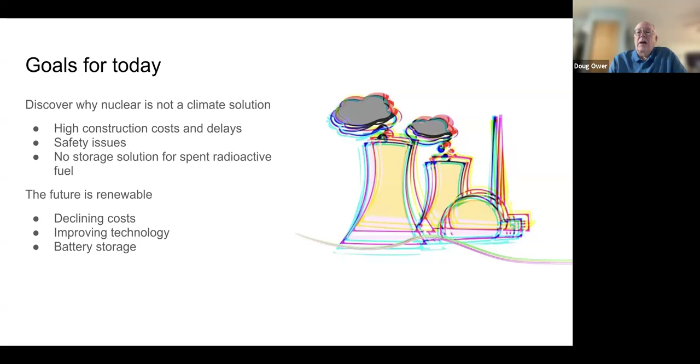The future is renewable power, and costs are going down, technology is improving, and battery storage, which is a vital piece of that to make renewable work, is also coming on very strong. We'll get into that more as we go along.

So here's the Zion nuclear plant. It started in 1973, 74. Each reactor started separately - there's two reactors, each one was about 1.1 gigawatts. It shut down in 1998, and then decommissioning started about 2010, went to 2023.

The ZCAP commission was basically disbanded when COVID started. Most of the decommissioning was done, but there was a problem, which I'll mention later. The site was released by the NRC, so the nuclear license was transferred back to Constellation from the contractor who held the license during the decommissioning. It was about $900 million to decommission that plant, and that's actually on the lower end of the scale - San Onofre is going to be over $4 billion to decommission.

We are left with 65 dry casks of spent radioactive nuclear fuel, and high-level nuclear waste stays on site. There's no place to send it, so we will have that sitting on our lakefront for many decades to come.

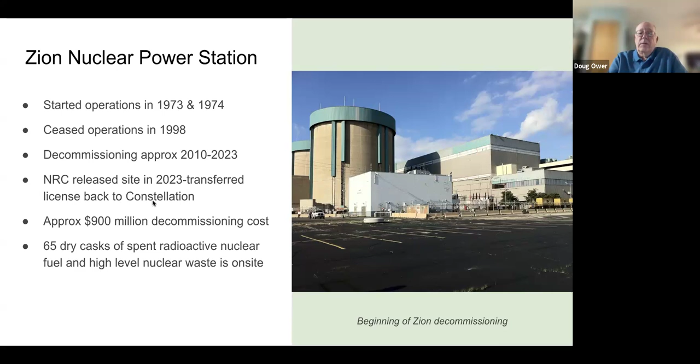Okay, why is this not... I was asked to describe a little bit about the nuclear cycle. There's a couple different ways of doing it, but this is what Zion was - it's a pressurized water reactor. On the left side is where the nuclear rods are, or the core, and control rods to control the reaction. Basically all it does is generate heat - the whole point to nuclear is to generate lots and lots of heat.

That very high pressure, very hot water is pumped to a steam generator - they're both inside the containment dome. From the steam generator, that's converted to steam, and that feeds out to turbines. They show one in the picture, but in reality there were two - a high pressure and low pressure turbine, and then those spin an electric generator, which feeds out to the grid. On the lower end of the drawing, you have the condenser - you have to turn the steam back into water to reheat it. Here it shows a cooling tower, but in Zion, we just dumped all that extra heat into the lake.

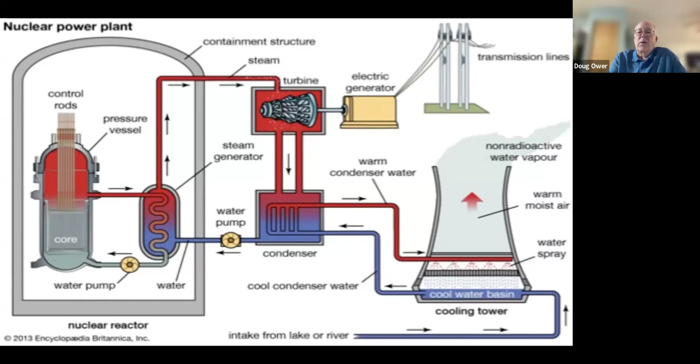Several things are done - one of the sites we have in Illinois, one of the nuclear plants, they have a big artificial lake they made that they use for cooling. Sometimes it goes into rivers, but the cooling tower is very common - that's what a lot of people see.

So this is inside the plant during decommissioning. You can see in the front is the generator, and then there's two turbines - this is for one of the reactors. There's a high pressure, low pressure steam turbine, and then that spins to operate the generator.

One of the strange things about Zion is when they shut it down, they reversed that - they turned the generator into a motor. They powered it from the grid, spun the motor to turn the turbines, and they said that was needed to stabilize the grid. I don't know what they did after that was disconnected, but they did that for a number of years after Zion closed.

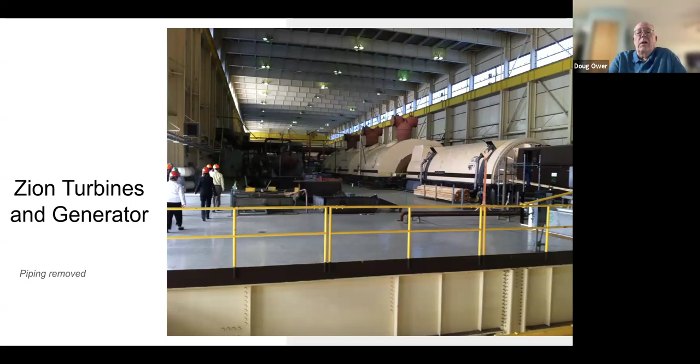So this is Sierra Club's position on nuclear power. This was adopted in 1974, and it opposes the licensing, construction, and operation of new nuclear reactors, pending resolution of safety problems inherent in operation, disposal of spent fuels, and possible diversion of nuclear materials capable of use in weapons manufacture. All three of those problems still exist. It also calls for establishment of adequate regulatory machinery to guarantee adherence to the foregoing. Right now, there's a lot of talk about reducing nuclear regulations, which will make it even less safe.

As I mentioned, it was adopted in 1974, and it was readopted in 2024.

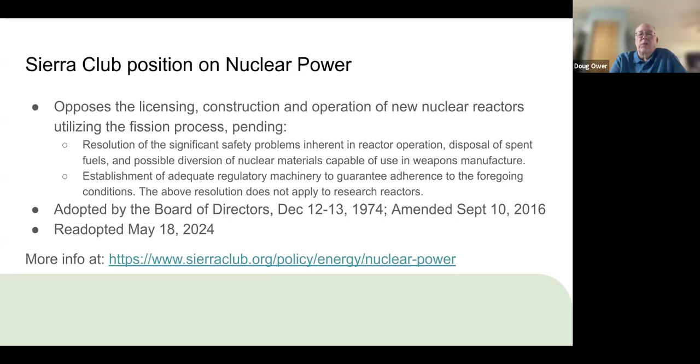After the Three Mile Island disaster occurred, Sierra Club added to that policy. This was adopted in 1979, just a few months after Three Mile Island, which was a meltdown. The addition is that the Sierra Club opposes any new construction, supports a systematic reduction of our dependence on nuclear fission as a source of power, and recommends a phased closure and decommissioning of operating commercial nuclear fission reactors.

So when we were working on our major energy legislation in the state, FEJA, the Future Energy Jobs Act, and CEJA, the Climate and Equitable Jobs Act, the state of Illinois Sierra Club had to get waivers because in the bill were bailouts for nuclear plants. It was felt that was the only way we could get on the path to renewable power, by helping those plants continue to operate. Unfortunately, that was kind of a necessity when half of our power is currently generated by nuclear power in Illinois.

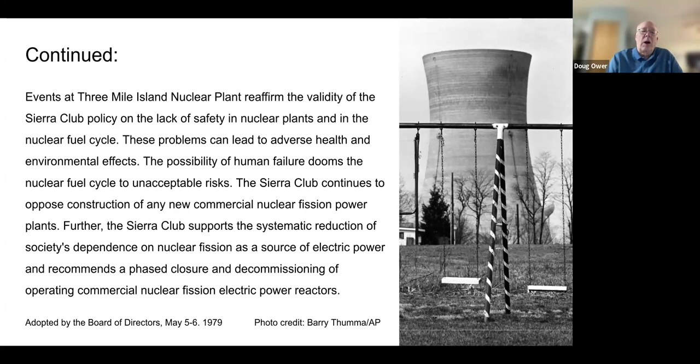Illinois itself has had a moratorium that was passed in 1987. Due to rising interest in small modular nuclear reactors, in 2023 the moratorium was lifted for reactors with a nameplate rating under 300 megawatts. Almost all the reactors we currently have operating are much larger than that - like I mentioned, Zion would have been about 1,100 megawatts in each reactor, similar to other reactors operating in Illinois. So 300 or less is considered a small modular nuclear reactor, abbreviated as SMNRs or sometimes SMRs.

So that portion of the moratorium was lifted. Right now there are attempts to totally eliminate the moratorium in Illinois. Senate Bill 1527 is strictly about the moratorium and would eliminate it totally. The Clean and Reliable Grid Affordability Act, everyone calls it CRGA, also has a provision that would end the moratorium. So if the bill passes as currently written, we would have the moratorium ended in Illinois on new nuclear of any size.

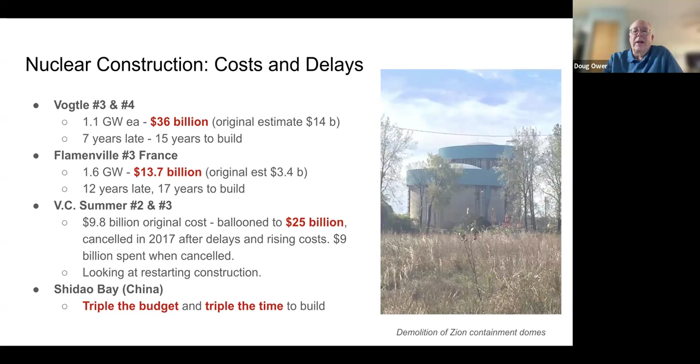There's one in China, Shidao Bay, was triple the budget and triple the time to build. Although China has gotten others online a little bit better than this particular plant.

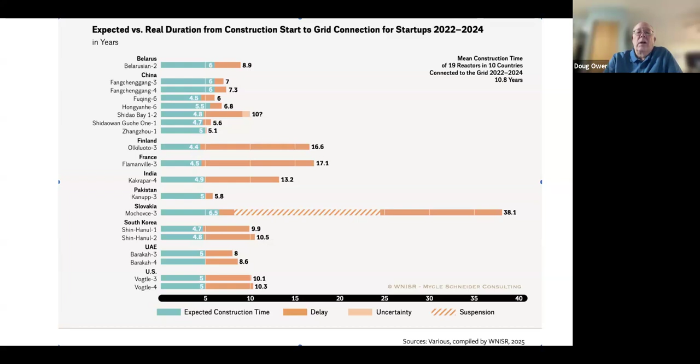South Korea, you can see extended lead times. Finland, extended lead times. India - I mean, China has probably done the best, they've got a few reactors on. But this is only a handful of reactors. It's not close to the amount of power that's happening with renewable power.

So the latest hot item are the small modular nuclear reactors. There's been a lot of interest in it. As I mentioned in Illinois, they dropped the moratorium on them. There's a lot of money available through the IRA and DOE and other sources.

The data centers, places like Microsoft and companies like that are very interested in nuclear, which is beyond me why they'd want to use it, because it's going to be their most expensive way to get electricity. But some of them are cracking deals to power their data centers with nuclear.

So there's been a lot of interest in it. There's a lot of different designs, a lot of different technologies involved. So there's a lot occurring in terms of coming up with designs, but most of them haven't gotten very far.

In the United States, there's only one that's approved, 77 megawatts. That's all. So the idea with small modular nuclear reactors is you would use multiple reactors and come up with something in the total size of 500 megawatts or 1,000 megawatts. But it would take multiple reactors to do it.

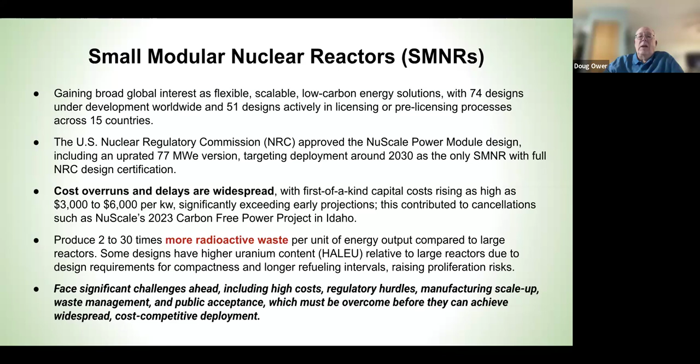So the small modular nuclear reactors have high costs, lots of regulations to get through currently, manufacturing scale up, waste management's a problem, public acceptance, which there's a lot of people that don't support it. So it's not ready to go yet. I think the closest project might be ready to go around 2030.

This was just recently published in Financial Times. Small modular nuclear reactors, you can see, are the most expensive way to generate electricity. Conventional nuclear is right behind it. Utility scale solar, combined solar and batteries, onshore wind—they're all lower prices than nuclear.

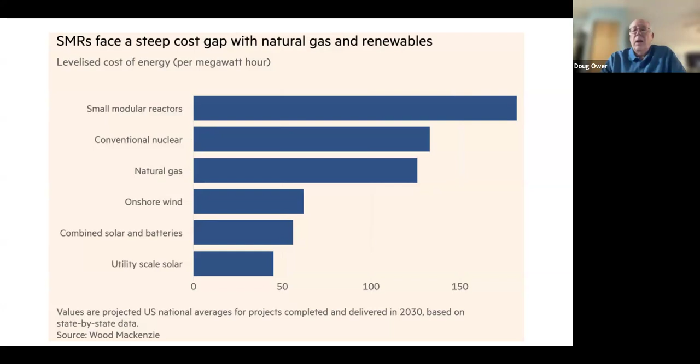As a reminder, in Illinois we deregulated the supply side of electricity. Commonwealth Edison in our area is the utility that distributes the power, but you can select your supplier, your generator, and they have to compete. So are you going to go for nuclear, which is going to be a much higher cost than solar, or are you going to go for solar when you look for a supplier? It's not competitive. And that's why they keep coming back for bailouts.

So, as I mentioned, bailouts. The Future Energy Jobs Act, passed in 2016, there's a $2.4 billion bailout over 10 years, and that was for Clinton and Quad Cities. So that was the first bailout we did.

Ratepayers pay for that. And then the Climate Equitable Jobs Act, passed in 2021, was almost $700 million over 5 years. Byron and Dresden were the two plants that received some funding on that. And Byron, they had threatened—now at the time that was Exelon, now it's Constellation—but they had threatened to shut down Byron, and it was within days of their threatened date when the CEJA was passed.

But we're not the only state that's been subsidizing or bailing out nuclear. Multiple states have, at least four or five or more have done that. Of course, there was a big scandal in Ohio about that bailout. I think maybe some people have been prosecuted over that. I'm not sure, but I think that's the case.

And then also all the nuclear plants in the states have been getting older and they're not competing or they're not competitive. So a number have shut down. So these are a few, like Kewaunee is near us. It's up by Two Rivers, in Wisconsin on Lake Michigan.

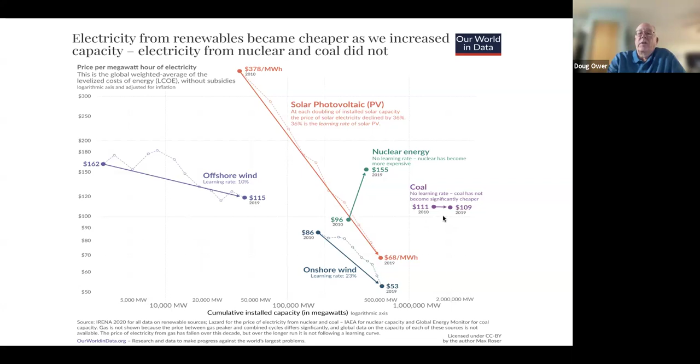Nuclear here is not much more capacity went in over those 9 years, but prices have gone up significantly. And coal, of course, has the most installed capacity, and that's been relatively the same price from 2010 to 2019.

This shows how much batteries are going in. They're now getting significant growth over 2018 to 2021 - it was 52% annual growth in grid scale battery storage. In the last 3 years, 115% annual growth. The solid line is the additions, and the circles are the cumulative amount of batteries. The left chart is gigawatts, and the other one's gigawatt hours.

So CRGA, which we're trying to get passed, part of it is to add 6 gigawatts of capacity to Illinois. We need much more battery power to go along with renewable power that's being installed. 6 gigawatts is roughly 6 Zion nuclear reactors.

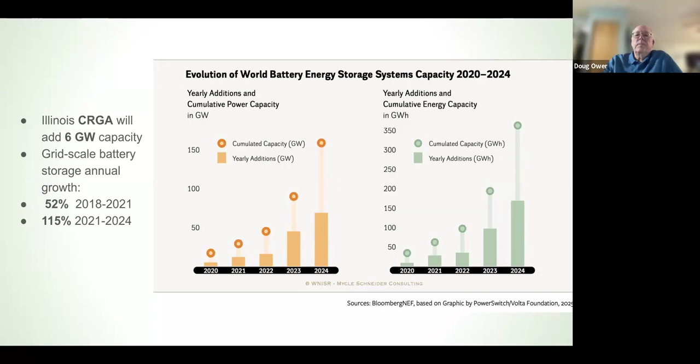I think one thing that gets overlooked - we do talk about the used nuclear fuel and that there's no storage for that, but realistically, every single bit of the cycle in nuclear has problems with radiation.

This photo on the right is one I took. We were at a nuclear conference in New Mexico - that's one of the mining sites. New Mexico has numerous nuclear mining sites. Much of the land is in indigenous areas, and they are faced with land that's contaminated, as well as water. They have lots of health issues because uranium mining and milling contaminates land and water. New Mexico especially has a lot of problems with that.

But even just enriching the fuel to a level that it can be used generates byproducts. And the other thing about the fuel that we didn't really get into - Russia is a major supplier of nuclear fuel, and that's not exactly someone we want to rely on to fuel our nuclear plants.

But then the plant operation itself generates all kinds of radioactive waste. I'll get into that a little bit more when I get back to Zion. Aside from the spent nuclear fuel, there's also contamination of the structures, equipment, and then the thermal pollution.

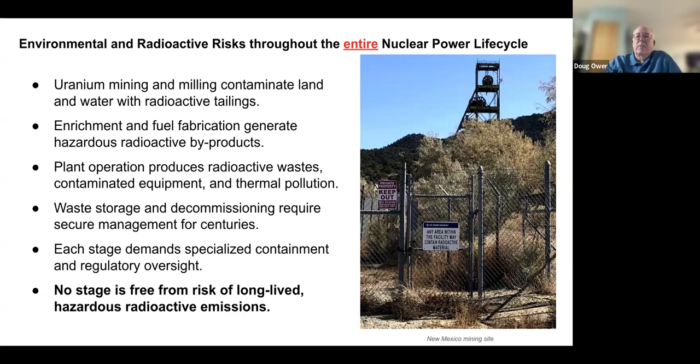As I mentioned, there's no approved site for a U.S. permanent repository - there's currently no site. The closest one was Yucca Mountain. That was decided politically and not through good engineering. It really wasn't a good site, but there was both political and legal opposition, and that was dropped during the Obama administration. There's currently no efforts that I'm aware of to establish a permanent repository in the United States.

So we're generating all this nuclear waste and nowhere to put it. The only site in the world that's about ready to go is in Finland, and that was already supposed to be open. Right now, it's not quite ready - may open this year or possibly next year. But that's the only one. So all these countries that are using nuclear power have no place to send their waste.

So one of the solutions that was suggested, which personally I think violates some of our laws, was to put in consolidated interim storage facilities. In other words, we move the fuel from sites like Zion - there were two places that wanted to do it, one in New Mexico, one in Texas. So we would send our dry casks there. It would sit out there, who knows how long, until they find a permanent storage site, which we're nowhere close to having.

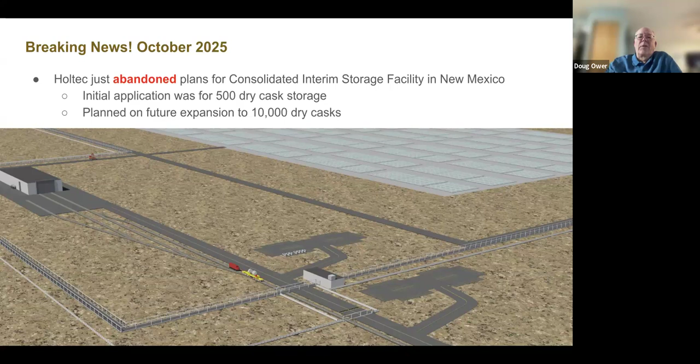So, in terms of waste, let's look at what occurred in Zion. As I mentioned, the decommissioning took about 13 years. They thought they were done right about the time COVID hit, and it was delayed. NRC found several hotspots, and they had to go through a whole process on resolving that issue with radioactive hotspots. Finally, that was done. NRC approved, and the license was then transferred from Energy Solutions back to Constellation in 2023. It cost almost $900 million.

Energy Solutions created a subsidiary called Zion Solutions and agreed to do it. They wanted to get in on the ground floor because of activity around closed nuclear plants, and wanted to make sure they would be one of the major companies involved in decommissioning. So they agreed to do it for the cost of what was in the decommissioning fund in Zion. And of course, they owned the site in Clive, so if they had to, they could probably discount what they charge for that. But they basically used the entire decommissioning fund. We never did get a final accounting of what the total cost was, but it was somewhere in the vicinity of $900 million.

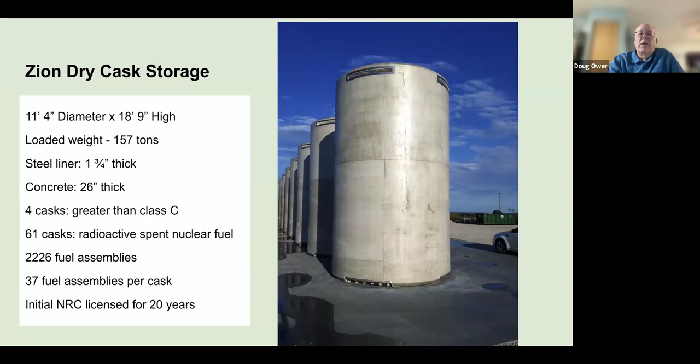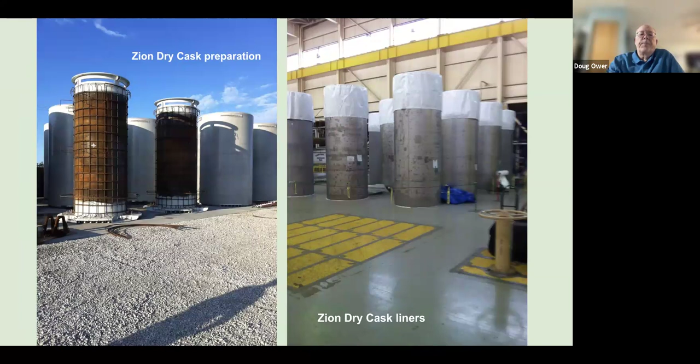And they have to be inspected. Security guys do that, and also Illinois Emergency Services - I forget their exact name - they do have some monitors in the area that monitor for radiation in case there's any leaks.

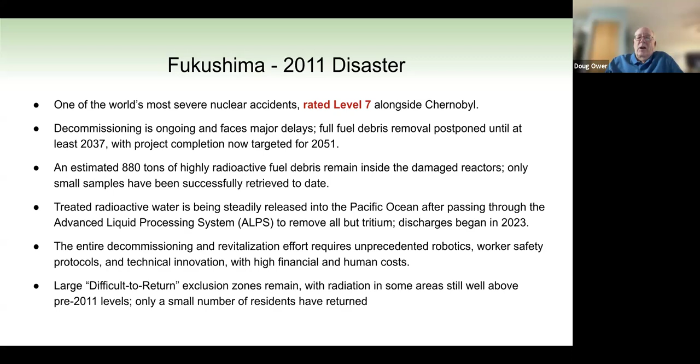The other worst disaster was Chernobyl, also rated level 7. That occurred in 1986, and as I recall, I don't think Russia told anyone. Several countries were picking up an increase in radioactivity in the atmosphere, and that's when they discovered this incident had occurred. So they put some sort of a sarcophagus around Chernobyl a long time ago. That was failing, so they built this dome that we'll get into in a minute.

The estimated total cost was $700 billion over 30 years to fix. There's still an exclusion zone around the reactors with restricted access because it's contaminated. There's also another plant, Zaporizhzhia. They're both located in active war zones due to Russia's invasion, so we have two nuclear plants that are at high risk because of war.

Zaporizhzhia currently has no external power. They've had no external power for about a month. They have to cool the spent fuel and the reactors, and are currently doing that with diesel, but their power was disconnected. So that's an active risk right now.

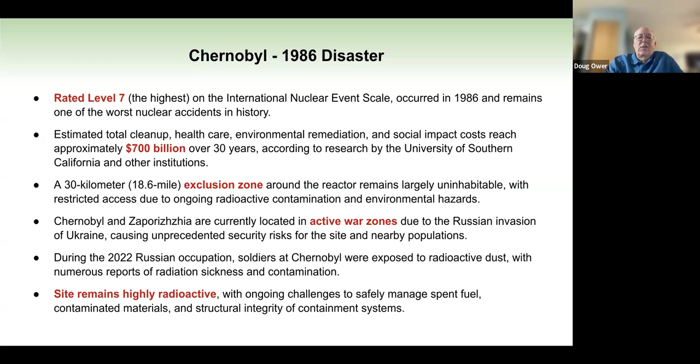Also, during the occupation, Russia had soldiers at Chernobyl, and they were in this exclusion zone. They were exposed to radioactive dust and dirt, and there's been numerous reports of radiation sickness and contamination because they were in a radioactive site. The Chernobyl site is still highly radioactive. It's still difficult to manage the spent fuel, contaminated materials, and structural integrity.

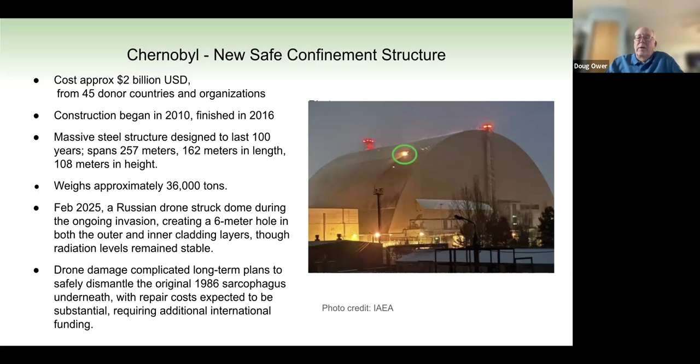That green circle is a spot where a Russian drone hit it, I assume with a missile, creating a hole in both the outer and inner layers, which has created more radioactive risk. This is just one of these risks, and is another reason why nuclear is just not a good way to go.

So let's sum some of this up. New plants have very high construction costs and take excessive amounts of time to build. Nothing has changed there, it's been that way for decades. That's why they haven't been building a lot of nuclear plants. Installation of renewable power and battery storage is increasing rapidly, and costs are dropping every year.

Currently, there's no permanent place to store spent nuclear fuel in the United States, so that's a big risk. We have this all over the place, and small modular nuclear reactors will add even more sites if that ever gets going. There are still major safety concerns.

Major accidents have occurred, minor accidents have occurred. Many things can occur, and cleanup is expensive and difficult to do, and can also potentially impact the health of people living in those areas. There's still issues about release of radioactive water. A lot of plants generate tritium; it occurs sometimes as part of the process, so some plants are contaminated with radioactive water.

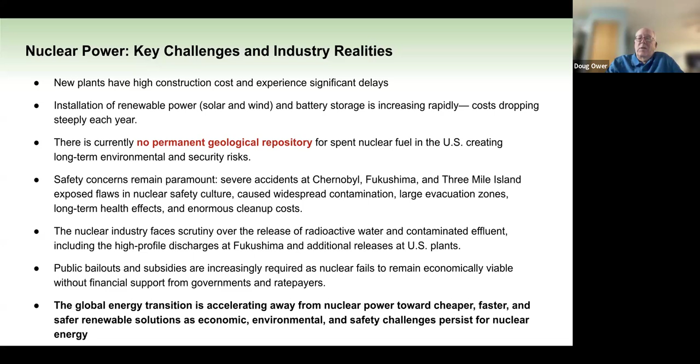And that's it. So, any questions?

Oh, wow. So, Linda and Steve, do you want to pose the questions? Some of them I think Doug already answered, but can you see the chat okay?

I did not see the questions during chat. Can you see them, Linda? I can, Steve's having trouble seeing them too. Here's the first one: what did all the hot water from the Zion plant do to the Lake Michigan environment?

That's a great question. Lake Michigan is of such a volume that it's a huge heat sink, but it never should have been allowed to begin with. They should have had to put in cooling towers. I think if they tried to build Zion now, they'd have to put in cooling towers. They're just not allowed to put that amount of thermal energy into a body of water.

But on the positive side, it was a great fishing spot. I'm sure that heat would have dissipated, but it's a lot of heat, and they weren't the only ones doing it. Waukegan Coal Plant was dumping hot water into the lake, I think Palisades was, Kewaunee, and there's another one up by Two Rivers — I think they were all dumping water. So there's a lot of thermal energy sources going into Lake Michigan. That's just not the appropriate thing to do. I can't say specifically how bad it was for our area, but it's not the right policy.